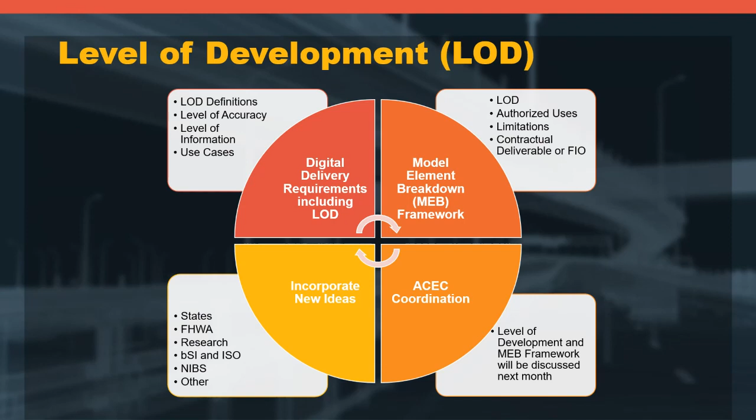Thanks, John. So I'm leading the model as the legal document subcommittee, and one of the things that we're looking at is, and Randy, it looks like we're 1 slide past. Yeah.

Our approach has been, and this is not just the model as legal document, it's actually the maturity as well, but we've looked at essentially 5 different levels where you're starting to leverage 3D, and then ultimately you're delivering the model contractually, and you're requiring asset management that's captured in the field as digital as-builts. And so at each one of those levels, there's a suggestion of what a DOT or an organization would do to be able to leverage that level.

So some DOTs will be starting with 3D models, and other DOTs may already be collecting information in the field, but this is kind of the intent here, to give some guidance on how to do this. So that suggestion is maximizing that progress and what other DOTs may have done that's helped with that. And then also with those other DOTs, hopefully what we're going to be doing is what we call R&D, which is rip off and duplicate.

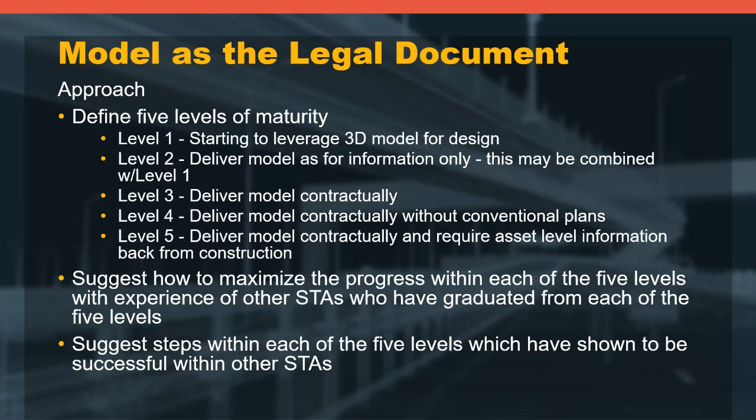And as John suggested, and I think Will may go over as well, or I guess it would be John in the 3rd session, our goal is to have something in the fall to put out so that organizations can look at this and see where they fit and some of the suggestions that would get them there. So with that, I believe I'm turning this over to Will, right?

That's right, George. Thanks. So a couple of other subcommittees we have. Jennifer Lloyd with Tennessee DOT is leading the webinar series subcommittee. And this has been really good because we've had a lot of detailed discussions within our committee, but we really want to get the word out to other states and other folks in

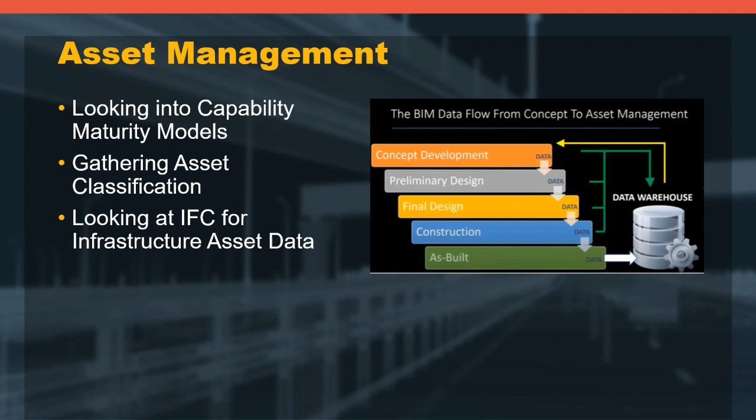So the next steps with JTCES, one of those is Mike Kennerly announced at our meeting earlier this month that AASHTO has identified a chair for this new cross-disciplinary committee to oversee the IFC adoption. That's Mike Boozleman with Montana DOT. So we're really excited to see that group start to get stood up.

Our group is also working on publishing draft guidelines this fall to get those out to anyone that's interested. I know John Wilkerson's been working hard on the level of development framework and getting that draft out. And then Mike Kennerly and George and others are working on the BIM maturity model guidance and really developing guidance on how you move your agency from wherever you're at in the process to full digital delivery, including digital as-builts. So look for that guidance later this fall.

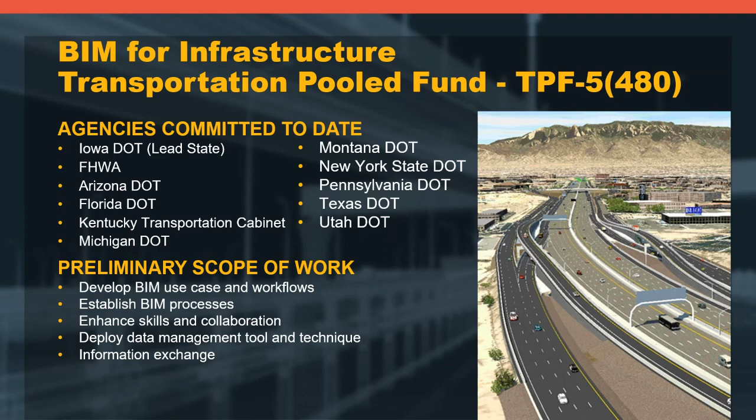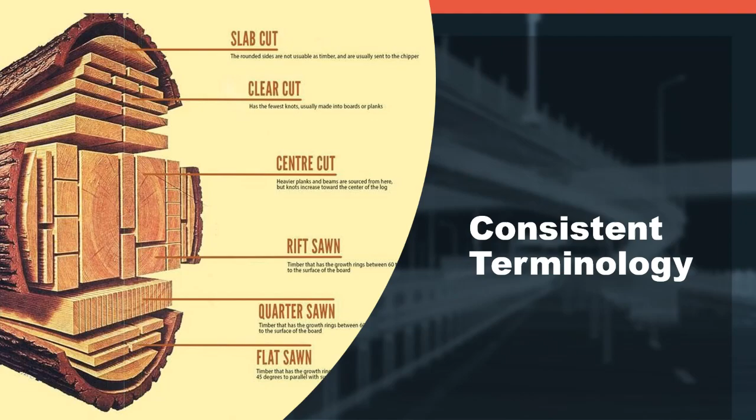We need quantity takeoffs for that lumber, John, it's all gone up. So we needed some QTO on that.

My name is Lance Barvey. We're going to be talking about building the business case for open standards in BIM and transportation. Next slide. I'm with WSP, BIM Services Director, and also TRB co-chair for the BIM for Infrastructure subcommittee with Chuck Hickson from Digital Construction Works. Next slide.

I have the pleasure of introducing some of the presenters today for building a business case for BIM. Ian Howell is principal consultant for Built Environment Strategies, and he's also engaged as the U.S. representative for buildingSMART International, supporting the U.S. chapter. He previously worked at Autodesk, Blue Line Online, Newforma, and other firms. Morgan Kessler is with FHWA, and he is the Highway Research Civil Engineer for the Infrastructure Preservation and Asset Management Team at Turner-Fairbank Highway Research Center, and provides national applied research and technical assistance to FHWA and its partners.

Alexa Mitchell is with HDR. She's Transportation BIM program manager and brings over 20 years of experience in highway design and construction automation. And lastly, Eric Silwick is with Sundt Construction. He leads their frontline construction technologies and focuses on BIM digital tools and construction technologies, delivering models from the office to the field. And so with that, I'm just going to hand it over to Ian Howell as he starts the presentation. Thank you, Lance.

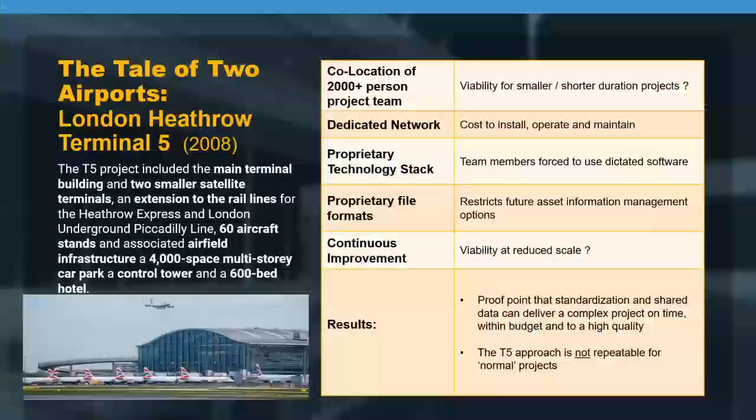That's it. Where they basically were trying to pull together a master plan looking at a lot of existing buildings and facilities, as well as new construction that was planned, to try and take a federated look at the entire airport as a master plan. And they did that using open standards. Very different approach to what had happened on Terminal 5 many, many years before. And they were able to take 100 disparate models and successfully geolocate them using the IFC standard, with 250,000 elements modeled just for the new terminal building.

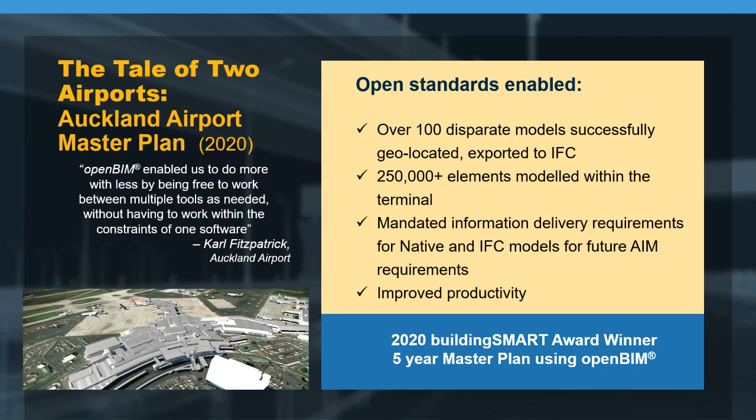They put in information delivery requirements for the future use of this information for asset information management. And basically were award winners at our buildingSMART International Award competition for the use of open BIM. So a very, very different open standards approach to being able to design, construct, and manage an airport.

On the next slide, you'll see that this isn't just applicable to airports. This is an example in Germany of a 65-kilometer stretch of roadway where IFC was used as an open standard to really federate the information from 36 different BIM users across 8 different companies, 20 different models from 5 disciplines, 6 different software applications were used, and 1.3 million objects were federated. So this is a wonderful example as to why AASHTO are looking at the IFC schema as a national standard for engineering data, because it really shows that open standards can provide productivity and efficiency. This was a special mention for team collaboration in our awards.

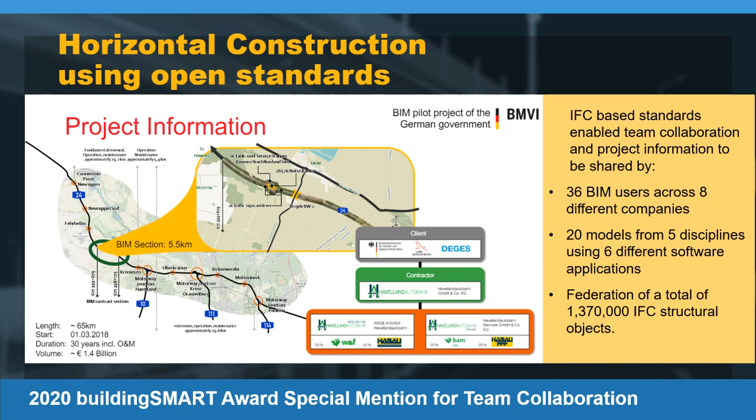So over the page, I wanted just to review and go through with you what are the lessons learned from those project examples. If we look at the left, yes, on the old approach, you can dictate a single technology stack, but the downside of doing so is that you sacrifice best-in-class functionality. That best-in-class choice is available through open standards. In other words, different software can be used by different consultants from their own offices.

You can standardize on one proprietary file format, but then you're locked into a specific vendor and you don't have choice. You can use some data conversion methods, which have been tried at various times, but there's normally data loss associated with that, versus open standards, which enable data exchange. Different vendors give you siloed information. And coming back to a standard definition allows for data sharing in work processes and federation of models.

A single vendor can be easy in a way, but it does mean that the vendor controls your data. It is locked normally in a proprietary file format. And I would argue that it's much more important for owners to control their own destiny. You can certainly use different software applications, but that brings with it a lot of duplicate effort in terms of data entry, whereas open standards allow information to be exchanged, shared, and reused.

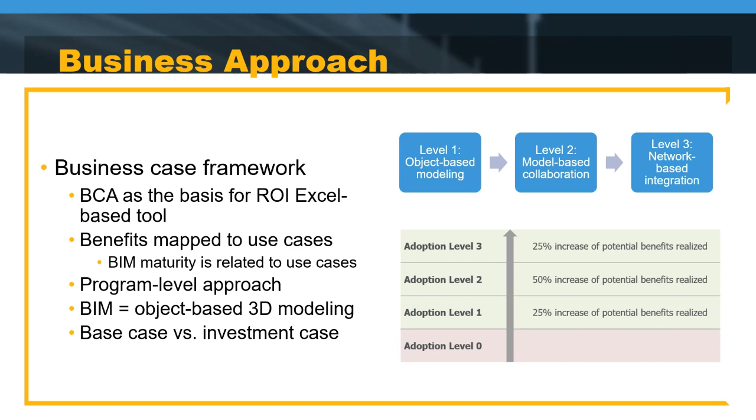So the base case represents the level of BIM adoption and could start at level 0, which is pre-BIM, not doing anything, to level 1 or 2, and could be compared to an investment case or a desired level of BIM capability, if you will, that could be 1, 2, and 3. So the returns from achieving different levels of BIM adoption are not expected to be linear. For example, going from 0 to 1 generates fewer benefits than going from 1 to 2.

So moving on, what did we learn from this study? At the beginning of the project, we set out to answer 4 questions. The first one being, can benefits be quantified? And yes, we identified 20 quantifiable benefits. I said earlier 24 benefits, but 4 of those were qualitative, 20 quantitative. Are the benefits of BIM substantial enough to justify the investment required by implementation? And we discovered that yes, based on the 6 benefits and 7 costs we were able to monetize.

And what is the cost of doing nothing? Long-term cost of not making this investment is likely to be significant. And that's because there are different ways that you realize to maximize the benefits, right? So the more you do with BIM, the more benefits that you are going to realize. And you're already probably paying for the software that allows you to do a lot of things, so you might as well get the benefits as well. And then strive to adopt that higher BIM maturity. And I can't say enough about open BIM standards like Ian mentioned. That really helps maximize your benefits.

So what you can expect from the products of this research: of course, the biggest one is the Excel-based toolkit, a multimedia package that Morgan spoke about. That would include 2 webinars, likely to be scheduled in August. If you register for this webinar, we are going to make sure that you receive a registration link when that is available. A final report, of course, that includes all the tasks and products of the study. The study ends at the end of August, and the products should be available soon after at the TRB website. And with that, I'm going to hand it over to Eric.

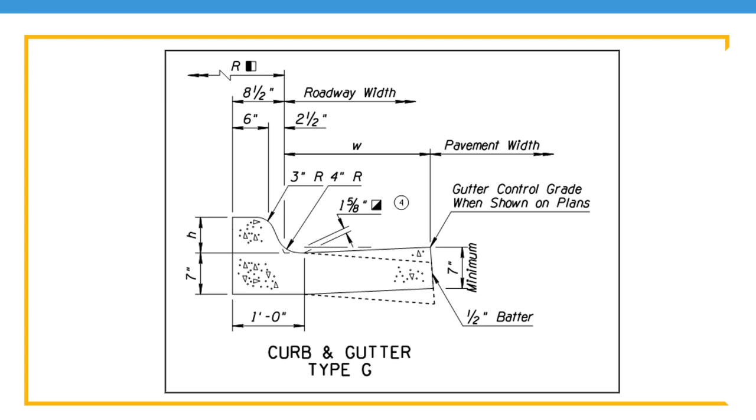And to kind of walk through this and apply it to a specific instance, here we have a typical type G curb and gutter. This one happens to be from the Arizona Department of Transportation, but it's got its shape outline, it has some hard dimensions, and then it has some variable dimensions. Let's go to the next slide.

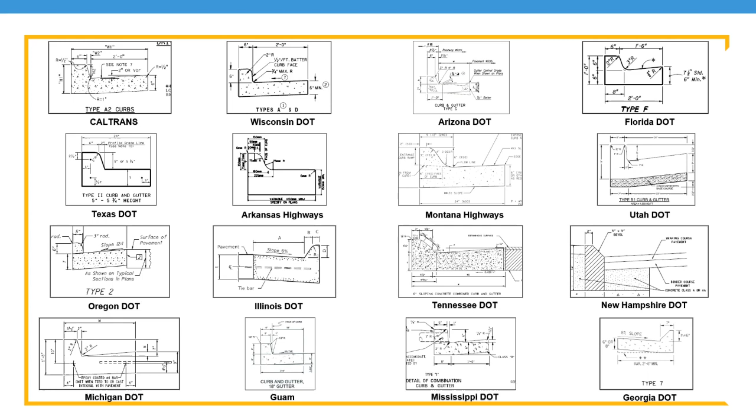And if we kind of zoom out and look at the perspective of this, we can see that a lot of DOTs use almost the exact same design language. And if we take the Florida DOT example here and imagine that we extrude it into 3D space, we can start to look at things like where that curb gutter flow line is, what the bottom area is, what the volume is, and even what the top back of curb is. And I highlighted those specific items because all of those are important to me as a builder.

We quantify things based on the gutter flow line length. We have to fine grade the area below the curb to be able to construct these elements properly, right? So there's different components of this 3D model that are extremely important to us. And when the 3D model is already created, we have the ability to go in and extract this information just when we need it. Our estimating team doesn't need to know the specific 3D surface for the bottom of that curb, but they care about that length of gutter.

And then when we go to lay out these elements in the field, we go off of the top and back of curb. And so we can extract that 3D information as well. And all of this is just like Craig Mundy mentioned, building on top of that last piece of technology, that last piece of information that was inserted into this. Let's go to the next slide.

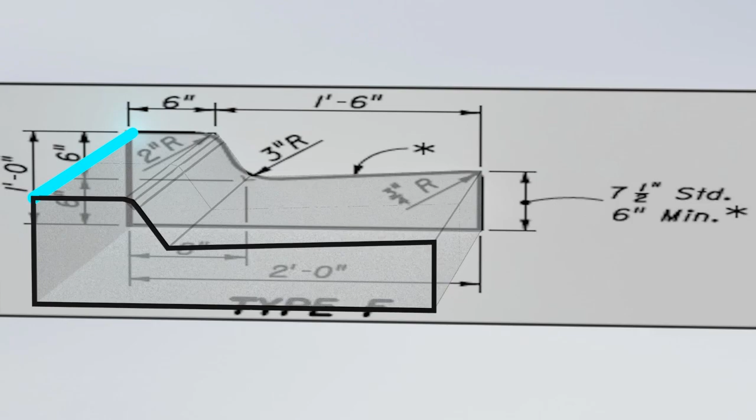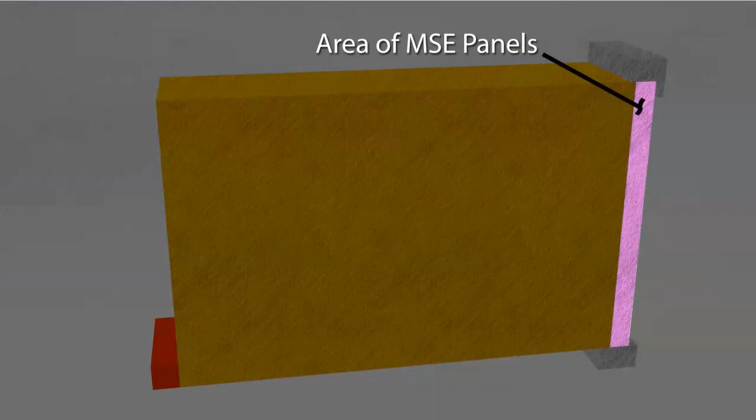Another good example is a MSE wall. These are very complicated shapes as they dynamically change, their strap lengths change. We have to record the actual bid item for the panel area versus the actual item based on what supplier we're using. But it covers 5 different quantity types. We have a volume of engineered fill. Let's advance to the next slide. Area of MSE panels, we have a length of precast coping. We're also going to need a count of expansion joints, and we're even going to need information on the weight of the rebar in that leveling pad at the bottom.

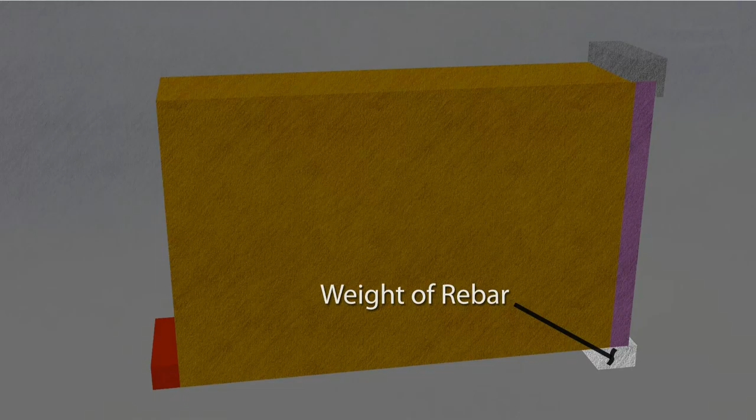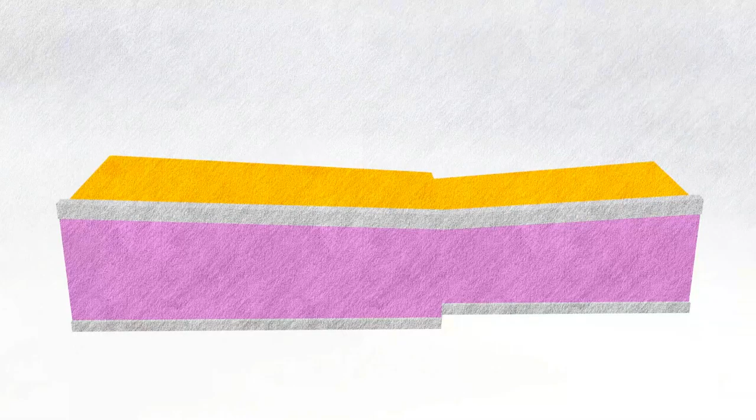But all of this can be communicated through some very basic information that I refer to as a minimum viable geometry, which is effectively a horizontal and vertical alignment and profile. And that allows us to apply those standards to be able to recreate any slice of that MSE wall. And from there, we can use a single model that, let's go to the next slide, allows us to generate all of our quantities.

We can see that in the bigger context of the earthwork. So not just what the quantities are for that MSE wall, but how much excavation needs to be done, how much special material backfill needs to be done. Does that correspond in appropriate line with the roadway profile? All of those things can be answered.

And when we use the minimum viable geometry and appropriate intelligent templates or assemblies, we are able to recreate that in a shorter amount of time, generate quantities, and then if we're selected for the project, we can take all of that same data and push it directly to the field, again shortening that distance between the design intent and field execution.

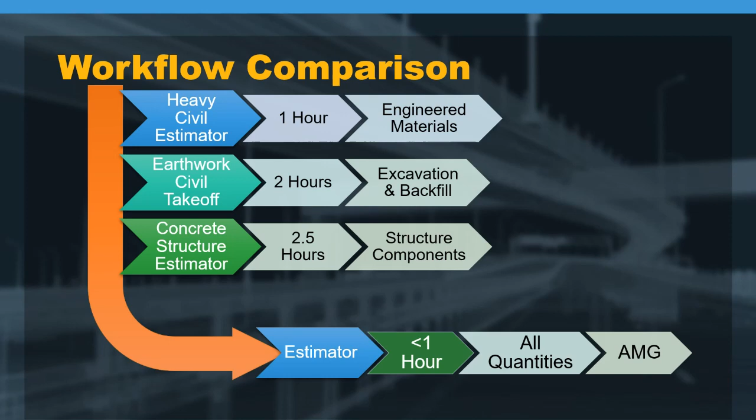Let's go to the next slide. And this is important for us, not just because it's helping us have higher performance, more predictability, and be able to get a lot better quality. But those that are coming into the construction industry are expecting to not have to trace cross sections for the first year or 2 of their career. That's not how they want to quantify things. They want to be able to get in and leverage modern technology to develop excellent construction solutions.

And so as we look at interns coming into Sundt, we have identified that they really enjoy using these new technologies. Being able to see something in 3D solidifies their understanding and what it's supposed to look like in the field. We get a lot better quality product that's much more accurate on the back end of it as well. Go ahead and go to the next slide.

And this is an example of us using these tools to be able to go in and show this is the kind of excavation we need, this is the kind of backfill, these are how we're generating quantities. We can generate cross sections that are loaded with construction information that's layered on top of the design information. And all of that also corresponds to the 3D visual of the model.

So that way when we start to go in, we call it a haystack condition, but here in the middle of these two MSE walls, it's not wide enough to be able to bring in just kind of general fill. So we have some additional construction quantities that need to be accounted for here.

And this kind of technology allows us to be able to go in and look at all of this in context. And again, I've said it a million times and I'm going to say it a million more, but it allows us to add our construction information to this as opposed to starting from a plan sheet where we have to go in and recreate the design and then add construction information.

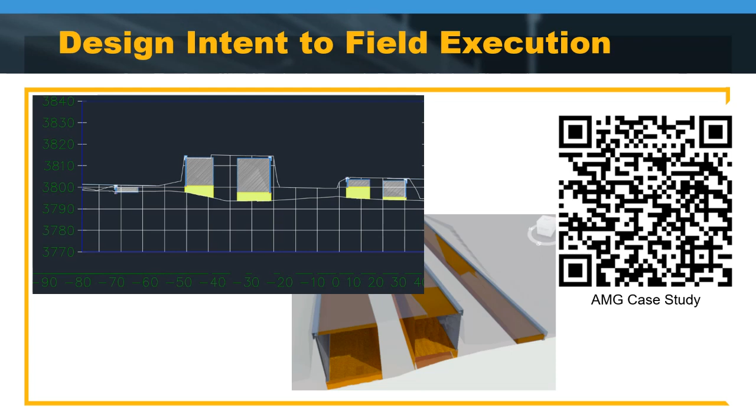So those QR codes, there's some references in there to automated machine guidance case studies to talk about how that impacts our productivity in the field. The first one was an ENR link about how these kinds of technologies are going to be changing the way we can perform construction. And if we go to the next slide, we actually have a link to a, oh, looks like it disappeared, but we had a link to a video for an AGC Innovation Award.

And if you search Sundt Construction AGC Innovation Award, you can see some technology that we've actually developed inside of Civil 3D to be able to pull in quantities in the right ways and means, and then also be able to generate some automated machine guidance data in a pretty straightforward manner.

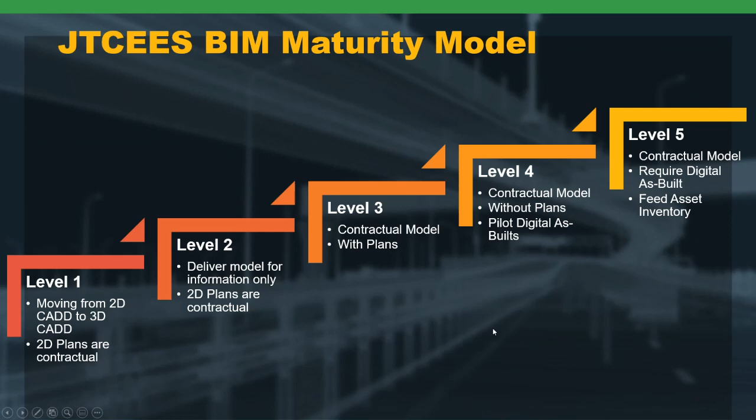So with that, how the maturity matrix or the maturity model is set up, next slide, is we really focus on the readiness of the people and the processes around the maturity. So really focusing on all those stakeholders and thinking about what resources they need and how you can bring them forward. We even include those resource agencies and permits and all parts of the asset life cycle.

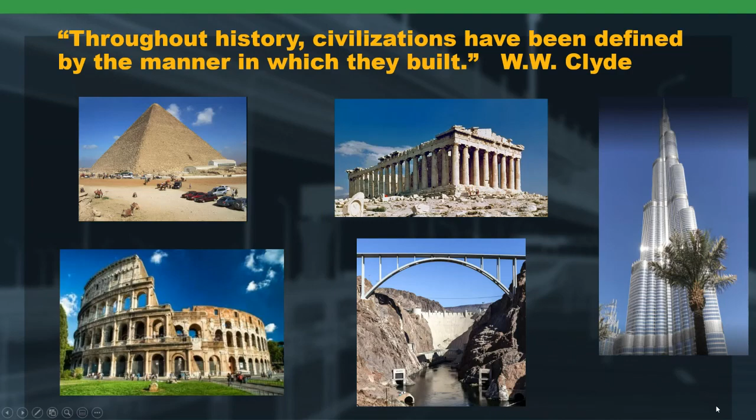And as a History Channel connoisseur, it's interesting for people to go back and look at what's been built, and they use that to kind of derive how sophisticated a society was. And we're no different now. So what are the ways that we're building now, and how will that define what we're doing? Next slide.

So on the left-hand side is some photos. As George mentioned, I'm the third generation of surveyors in my family. That's my grandfather and my dad in the 1950s on the left-hand side, using technology of the day. Above that was one of W.W. Clyde's first scrapers, and honestly, they started by using horse-drawn equipment, and they actually had a full-time person that would take care of their animals because that was important at that time. So within our own company's knowledge, we've seen things change a lot. Through the middle, you see the old school UDOT plan set. And then on the right-hand side, the technologies that we're currently leveraging. So next slide.

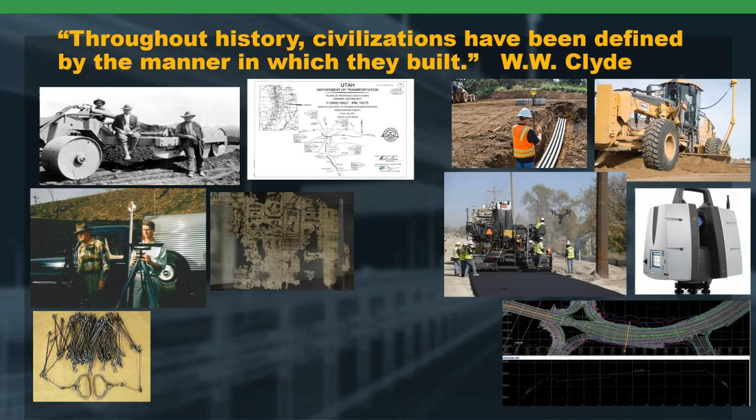What's enabled the change in construction, and it's happened throughout, but is the game changer lately, and it's really seen an acceleration in the last 15 to 20 years, is obviously the availability of technology in construction and the ability to leverage it into the field and accurately deliver some of these products. My training and my family history is in surveying, and there's been some giant leaps forward in the way that that type of data is leveraged out in the field. I often will joke with my dad that in any given day I will gather more survey data in one session of surveying than my grandfather maybe did in 60 years. So technology has definitely enabled this, but it also presents a challenge.

And the challenge within the contracting world was, how do we use this efficiently? Is it worth the investment? And once it is worth the investment, how do we get buy-in from top level down to the field so that the implementation just isn't for estimating or just isn't for stuff in the office, but we can actually use it at an on-project field level to leverage this, and then going forward to actually use the data that we gather to help ourselves in the future by using a 3D, 4D, and 5D type model, and then have a total asset management workflow that gets the data as we've constructed it, so that we're not constantly redoing some of the things that we always do when we start projects, like potholing for utilities and finding stuff that we just recently buried.

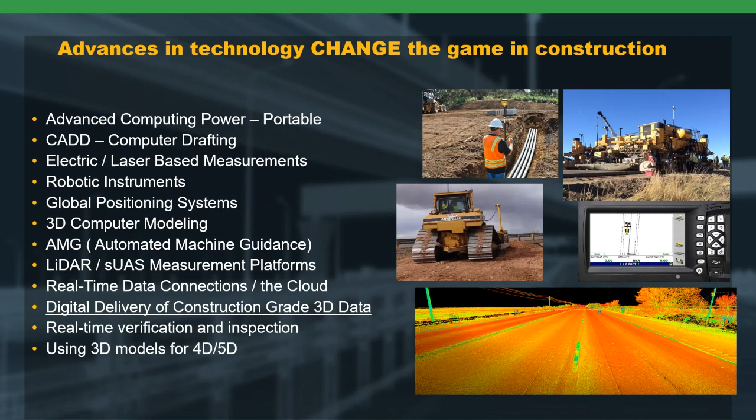These are examples of the digital workflow being implemented where we currently work in Intermountain West, and we've been able to partner with and work alongside the Utah Department of Transportation in order to use these digital delivery products and actually take them from field to finish, work through some of the kinks, celebrating the successes, and cry together a little bit with some of the pain points.

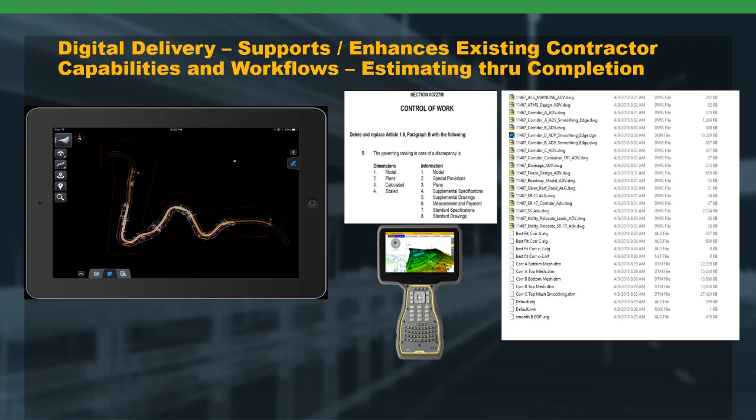But it's been a journey for all of us, and from our estimators through our project superintendents down to the foreman level, having this type of data real time available to them in the field has been game changing. And then in order to return this data back to the department at the end is next level. Final slide.

So it definitely is something that can be done. It's something that you have to kind of decide as a company and as a person and down to our foreman level that this is a change that's needed and we're going to embrace it. And like Eric alluded to with his quote, this is just the basis for the next change. And so we're excited for what's coming next. And with that, I'll turn it back over.